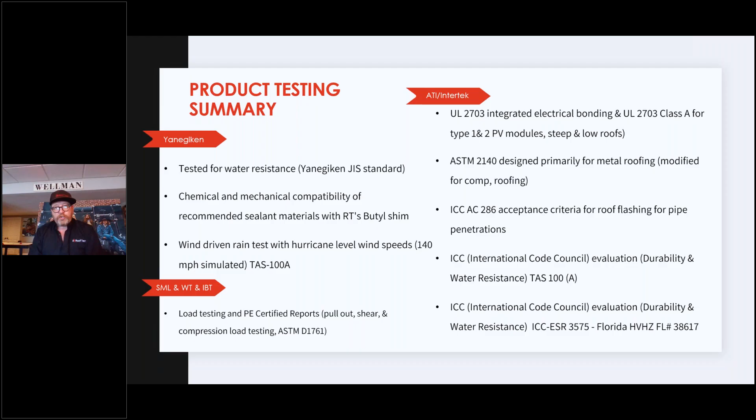I'll be hitting on a lot of this throughout this presentation with the amount of testing that we do. I think because we are a Japanese company, we like to fail on the side of precaution. Before we even send out anything to SML or UL or ICC, the International Code Council, things are done in our own facilities. We have in-house facilities in Japan, and we also have outside facilities. So before we even start having third-party testing, we already know what the outcomes are going to be.

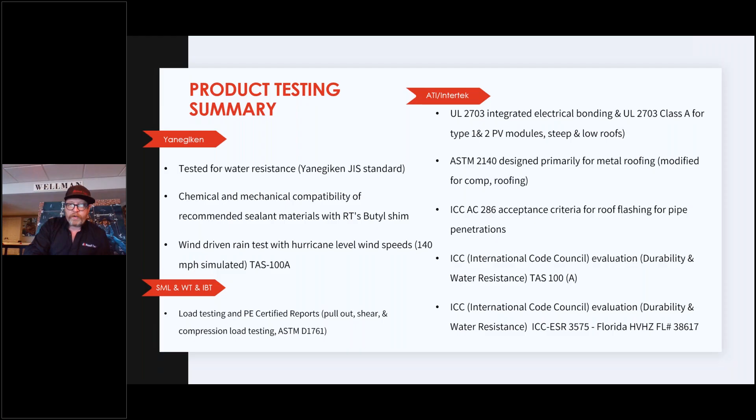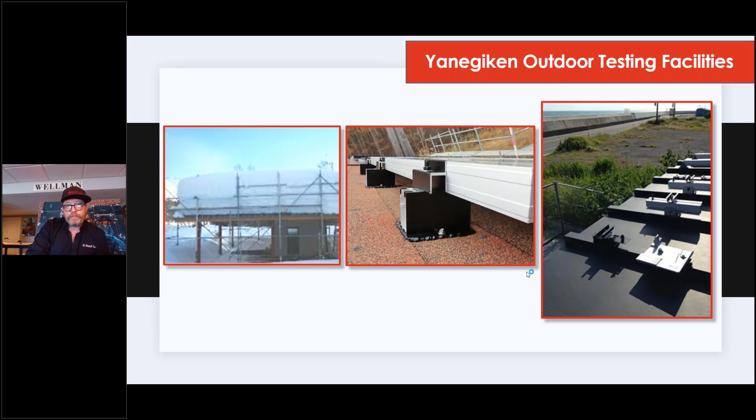I showed this test, this is some of the load testing we have done, but this is where we identified that with our Mini - I'm not sure if you guys are aware of our products or who uses our products, but basically all of our bases, from our railless to our Mini and even our new RE Plus or RT Plus, are set out basically the same. They have offset hole patterns.

The holes are not going to be directly across from each other. A lot of products out there now - we were the first to start doing this - because we were the first to identify that when you're installing this and using a top-down solution with screws and a combination of butyl, there is a possibility that you could be putting a base down right where the OSB meets, the plywood meets. This is a butt joint. So there is a possibility that one of those screws with our base could be in between those butt joints and really rendering it useless. It does not have any value.

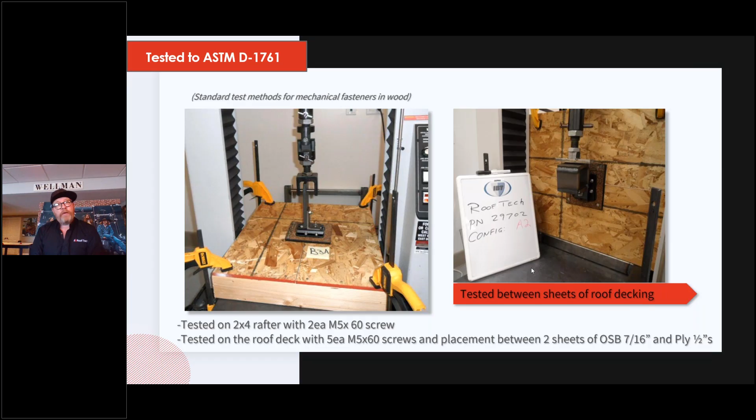So just because we say, hey, we have a 5-screw pattern - like if you're going for a decking solution, if you're going for a rafter, it doesn't really matter if you hit that butt joint because you're going to be hitting that rafter. But in any case, when you are doing a decking solution, there is a possibility of rendering that useless. So really 4 screws is what's required, but we think there is that possibility that one could be in those joints. So that's why we do have 5 screws.

More on the testing - this is a water test. Again, we're going above and beyond what these different facilities are asking for in testing. This is a fully submerged test. So when I say we're a waterproof solution, we are a watertight solution with our combination of screw. It's a double helix, designed to actually pull this butyl into the void and sealing it up at point of contact. Again, you'll hear me go back and forth between butyl or AlphaSeal technology.

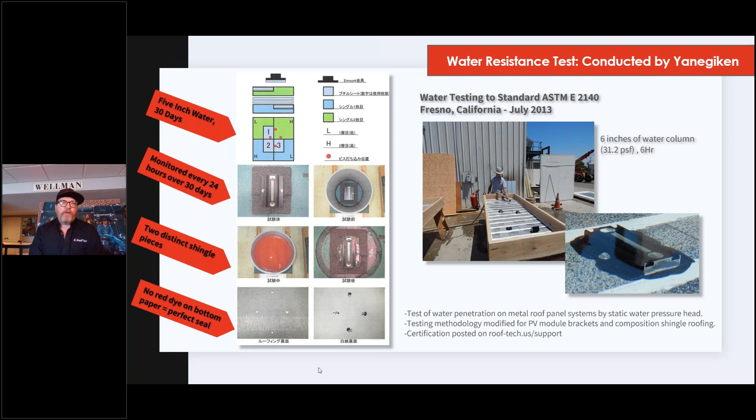The AlphaSeal technology is what we call the butyl, because not all butyl is the same. You could go to a Home Depot or a Menards or any kind of Ace Hardware and buy a roll of butyl. And I'm not saying that slapping that on the back would help, but it's definitely going to be different. This is our proprietary butyl, and that's where it's sealing up.

More on this testing - right now we are still continuing testing even our current products. Right now I am trying to work on our guys being able to install these products while it's wet or dewy outside. That trapping any kind of moisture in between the butyl and the shingle really is not going to matter. And we've kind of identified this because we've done these tests where we install it into like a bucket of water, so it's completely submerged.

When we put the screws in, we back them out - you can see the drip. You back it out halfway, it's sealed up. It's just, again, going above and beyond for this watertight seal. When most of the products out there are a water diversion, it's pushing the water away from the holes that you are creating instead of making it a watertight seal.

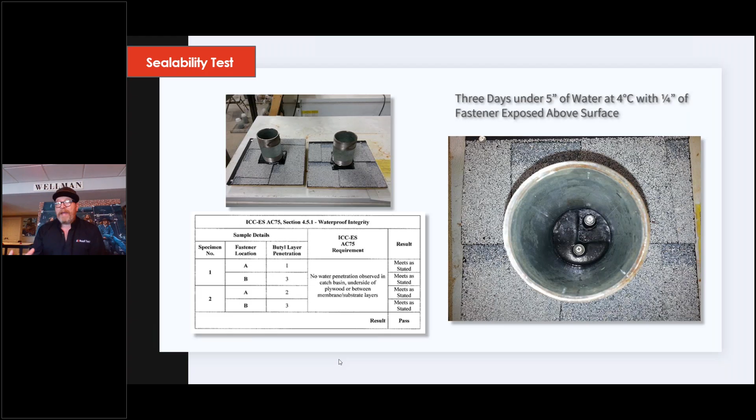They're easy to obtain, they're just expensive. Really, we're just going where the work is. If there's not going to be a lot of work there, people can do a one-off and we can point them in the right direction. But for areas that do have a lot of consistent work, that's what we're hitting up. You can get these on our webpage, or you can email me anytime and I can send them to you directly.

Having a tough time navigating this little scroll here. So again...

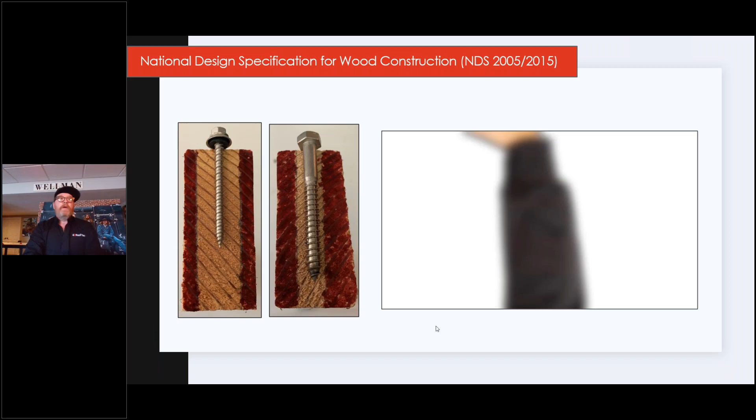Still, there we go. So these are our screws on the left. We got away from a traditional lag bolt. This is something that was done by the National Design Specification. This is basically stating that whatever you're putting into a rafter, because I still say that we need to hit quite a few rafters with our attachments.

We're not just a decking solution. So an all-decking solution is not really going to work in Canada with the snow loads and weather conditions. But down in Arizona and areas where there's obviously no snow, you can get away with more of an all-decking solution. But this company is stating that it should be 1.5 times the diameter of whatever you're putting into the rafter.

You can see the red in the areas. You put that on either side, and that screw or lag bolt cannot get into that red. If it does, you're risking blowing out a rafter, or also rendering it useless, or it's really not going to have the value that you think it does.

So it's just showing you that we're making it a lot easier for you to hit that rafter and know that the strength we're telling you you're going to obtain by hitting a rafter, you're actually going to achieve, because it's smaller. And I always say too that I like standing on 2 feet, not just one.

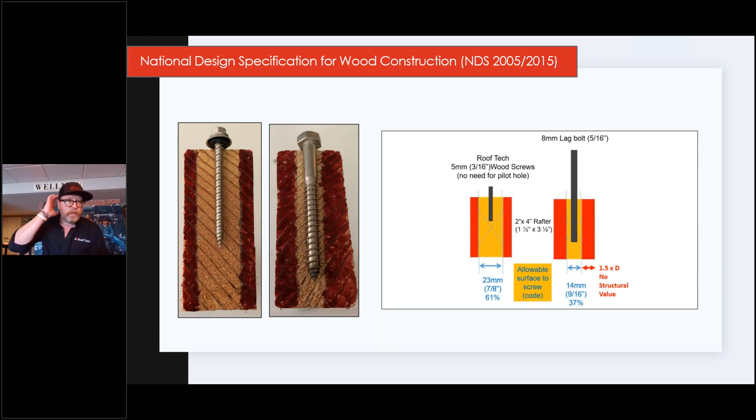Now, this is happening in the US a little bit more than in Canada right now, but you're having a lot of systems coming up on that 25 to 30 years of being installed, and either needing a new roof or selling houses. When they do inspections and they see this kind of thing, this might have passed when they installed the system, but it's not going to pass now, and there's a lot of fixes.

There's a lot of people going out there. In the US especially, there's a lot of companies that switched from doing brand new installs to doing remove and reinstall, fixing issues like this, just because of new roofs needed or selling of the house.

Again, you think that just because we're putting probably more holes on the roof than what people are typically used to with that one lag bolt solution, it's still just less damaging to the rafters altogether. It's less damaging to the roof as well.

Thanks, Guy. Just a quick question too - we should only be using Roof Tech screws with Roof Tech minis, right? I'm assuming a warranty might be void if we're using a different screw for extras.

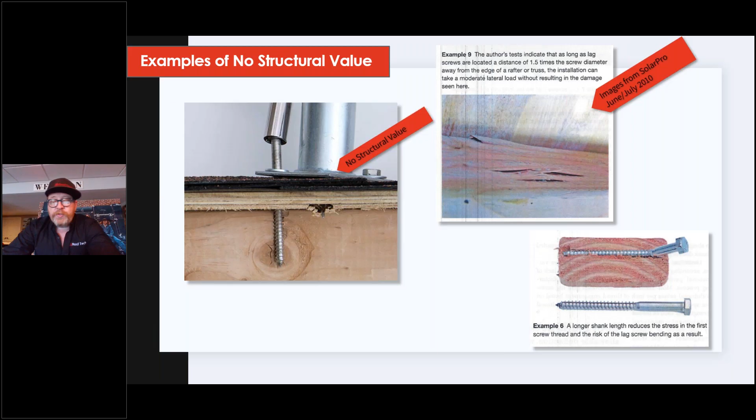And yes, using outside screws definitely voids the warranty. Thanks. Yeah.

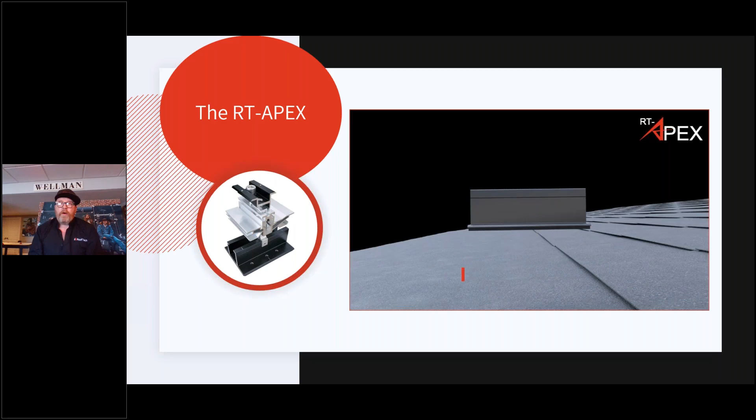So this is our RT Apex. This is our railless system. I don't know if you guys have come across railless before or used railless before, but that's how we started off. Our solar installs all were railless. Our products were railless at the very beginning.

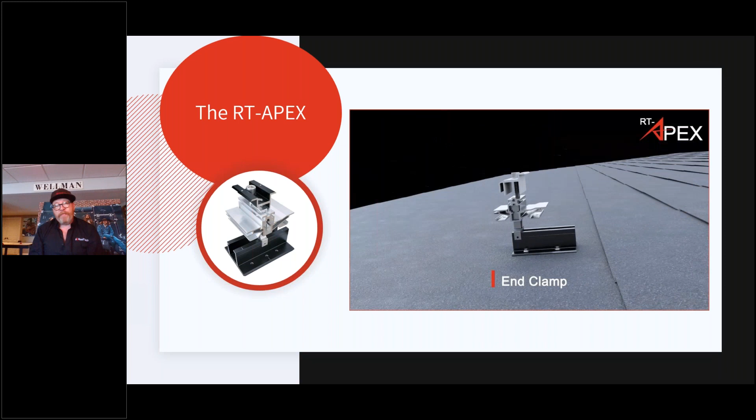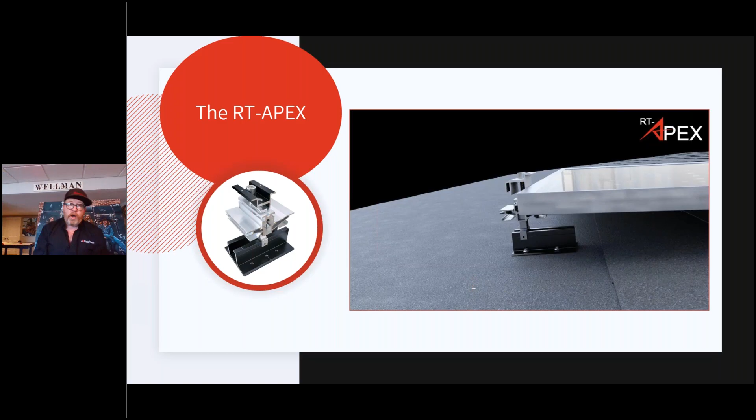And then we saw people grabbing our bases and attaching L feet to it and making the rail. So that's how we ended up developing the Mini. But we started off as a railless company, and this is our third generation railless.

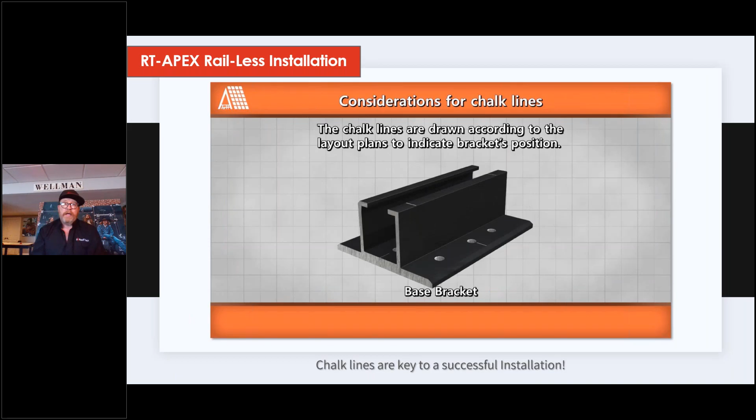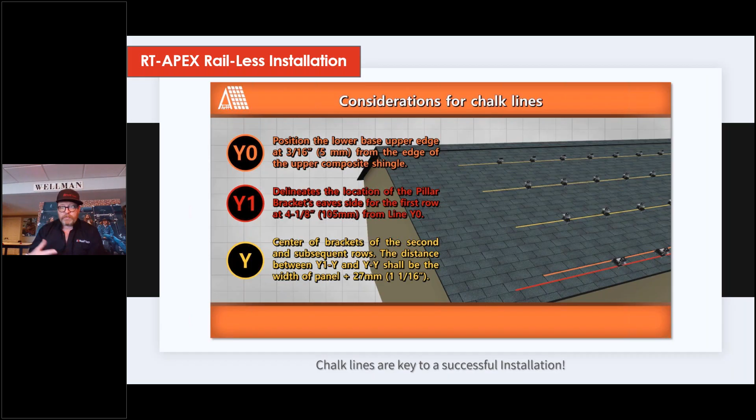So this video is showing you the layout guide and how to snap lines and take measurements for our railless system. We're not going to watch the whole thing, I just want to show you that we have a lot of continuing education on our webpage. Whether it's our railless, our Mini, new products, or conduit mounts, whatever it is, we make it a lot easier than just grabbing an installation guide, because as many of you know, most installation guides for any racking out there somewhat resemble stereo equipment instructions. They're very hard to understand or figure out how to measure certain lines. But we do it visually just so you have it there. You can also call me at any time.

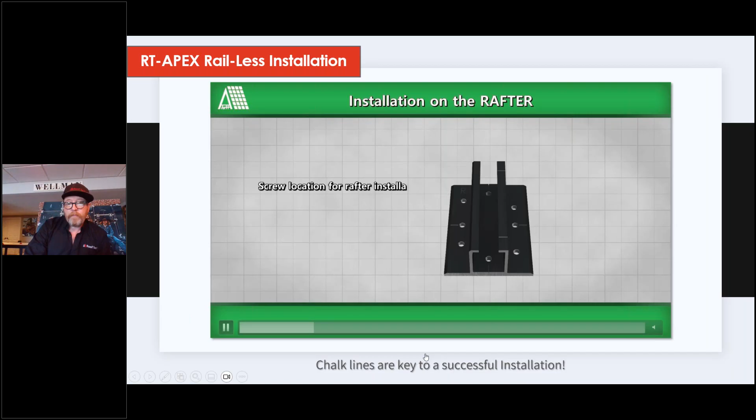There we go, it's like a lag on changing videos.

With our system, the railless system is one of the things we offer through BayWa as a buy-one-get-one-free program. So you buy a system and get a system, and if you do this back to back, we can typically be there for training on both occasions. So we do training for free as well on this. The reason we do this is because it's a lot different than what people are used to with a railed system. I'm not saying a railed system isn't going to fit for everybody, or that everybody's going to switch over - there are a lot of reasons to switch. But to know the system, it's a lot easier to have us come out and teach you how to use it than to try to figure it out on your own.

So this is the wire management side of the process. It's different - everybody else is used to throwing up their bases, throwing up their rail, and then doing all the wiring and wire management to those rails before even putting down glass. With this system, there is no rail, so everything essentially goes on the back of the module, which is a lot different than what people are used to, and a lot safer too, because you're doing more of this work on the ground than before. Your inverters go on the back of the panels, and all the wiring is done through the edge of the panels. S5 has a good MLPE bracket to attach the inverters, and EZ Solar is coming out with more products, it seems like every day, for wire management on both the rail and railless side.

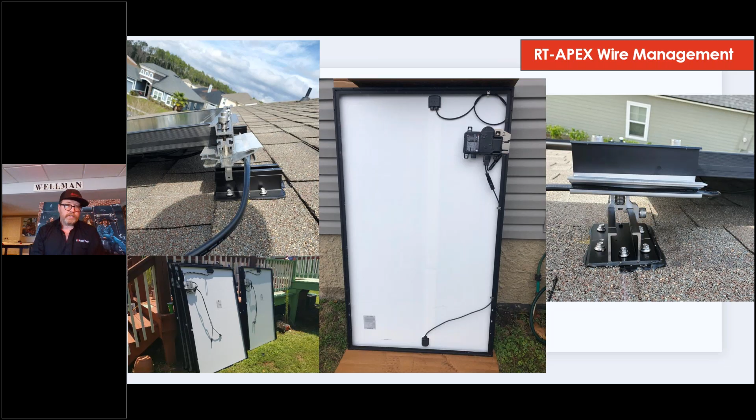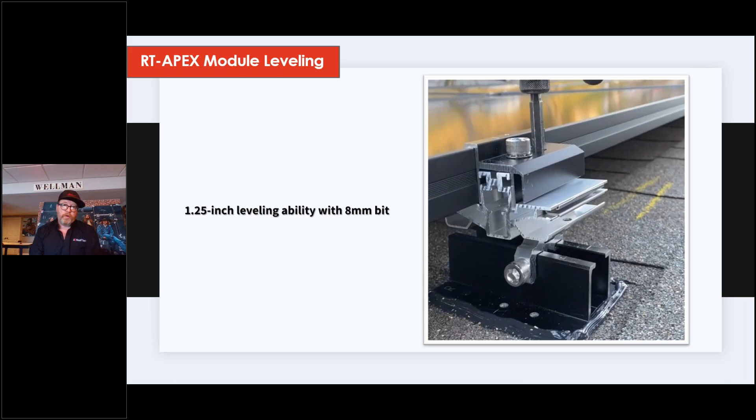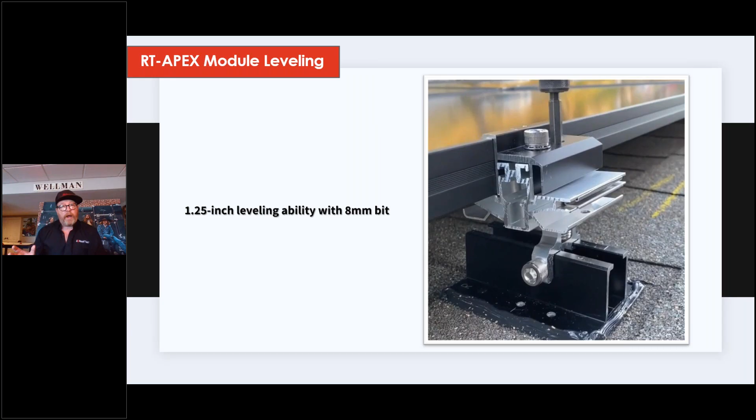The leveling here is right on top. We make it a lot easier than any other railless system on the market. Most railless systems require you to take apart the clamp almost altogether to get the leveling down - you're loosening the attachment to the panel, putting it back down, and hoping you got it right. Even some of our first generation railless was working with shims to do the leveling. But what I tell people, even if they're just going to use this as a one-off - maybe they get to a site, didn't see a stink pipe or something in their way, and the array doesn't quite fit the way they thought, so now they have to stick one or two panels outside the array in some area - throwing up a couple of clamps is going to be a lot easier than cutting little pieces of rail and having wasted rail just for those cuts. Then you can do the leveling here to match up perfectly with your existing array, so it looks just like it's all one array.

In this slide, where you can see the modules outlined in blue, the reason I'm showing you this is because the lower side of the roof is flat rolled asphalt, the one above it is a pitched shingled roof, and you have an offset array. The railless system altogether is a much more versatile product - it can do a lot. If you want to write your name on a roof, you're going to have an easier time with a railless system than a railed system, obviously. Sometimes these roofs will have one big array on the biggest part of the roof, and then they fill up a lot of the blank area with creative designs, whether it looks like a lightning bolt coming down or an upside-down triangle. It's just a lot easier with the railless system.

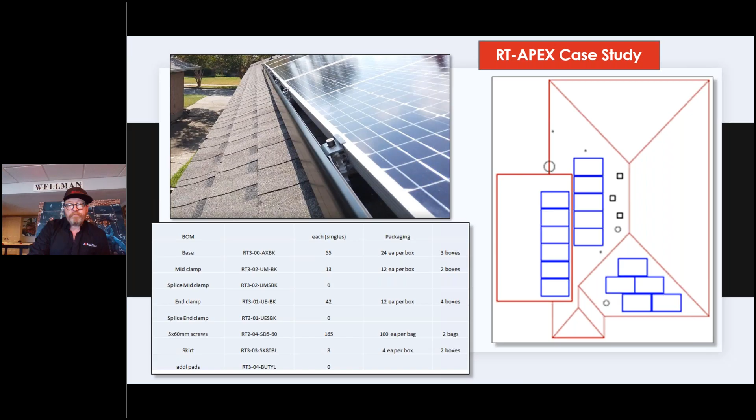Our Apex estimator, which is online, is something we try to do to make it a lot easier for you guys to come to BayWa and say, hey, this is what we need. It's very easy, a lot of drop downs, a lot of drag and drop. This is stuff that we can do with you guys.

We can train you on this. You guys could give us your specs, or we can do it for you, leading into you learning how to do it. But it's basically going to give you your BOM, your bill of material, and engineering docs.

It's very easy to come out with your layouts. Blue lines are your rafters. It's something I've seen a lot, and when we do our trainings, I bring a laminated copy of this array to show the installers, since sometimes the installers themselves, some of the lower guys on the totem pole, don't really understand what they're building.

What's the design look like? There's one head guy who's chalking out lines and just telling people, hey, where the X meets, that's where you're putting bases. And when they get to the end, then they see the layout. It just makes it look a lot easier.

It helps these guys, but ultimately this is something you guys would be providing BayWa saying, hey, these are the parts and pieces I need. It also states your criteria for that individual install - your pitch, your roof, your building material, and where it's located.

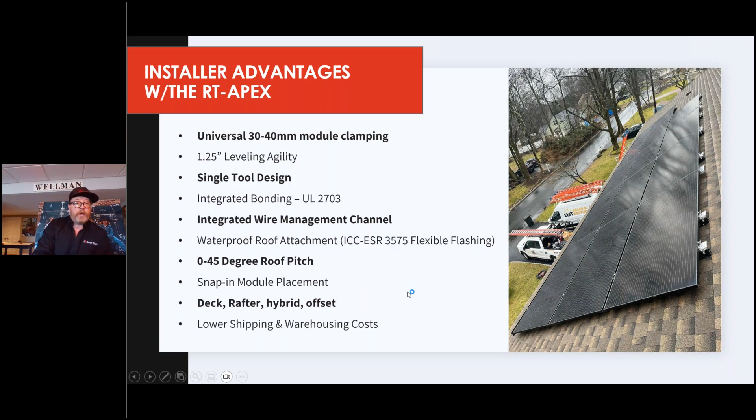Some of the things with the railless that we're offering you is BOM training, showing you what you're going to need, all the parts and pieces. Again, this is something we can handle for you going into it. But number one is the buy one, get one. Buy a system, get a system.

I always try to tell people, especially when they want to take advantage of it, saying oh I've got this crazy amount of modules we're putting down, I'll take that one for free. Obviously the less expensive one's going to be the free one. I always say too, try to make it simple. I'm just coming out there to teach you how to use this system.

Sometimes people want to get creative, and really the most difficult install is the one where they want to try a new system. Your installers are not going to thank you for it. But it's something we provide that nobody else does. So if you guys ever want to try something like this, let BayWa know, let me know, we'd be happy to come up and do the trainings with you. It's not that it's not a cold weather install, because it is, it's just nobody wants to learn a new system when it's freezing outside. They want to get in and off the roof as fast as possible.

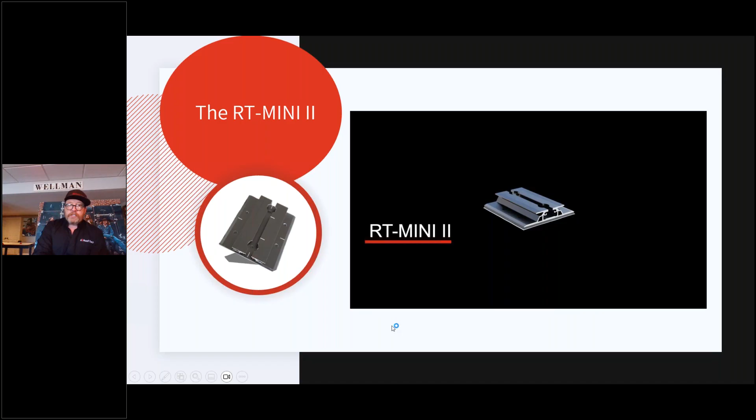The Mini really came from us starting off as a railless company, and then hearing that people are putting L-feet onto those bases just so they can install a railed system. So we developed the Mini. I don't know if everybody here is using the Mini or has never heard of it, but this has been the most popular product. It's designed so that we're just the base, and it's going to be anybody's L-foot, anybody's rail. So it just makes it a lot easier.

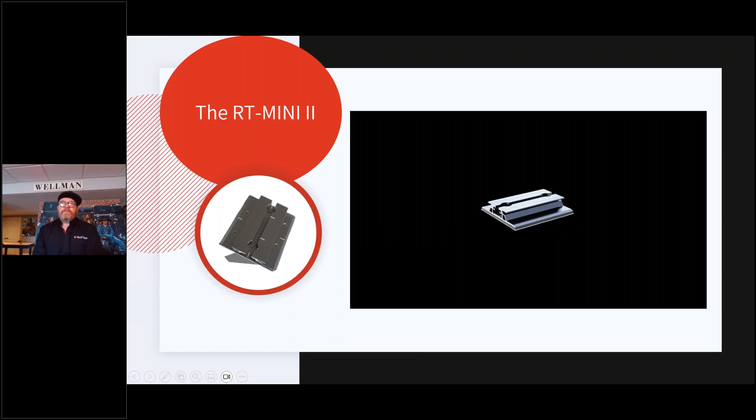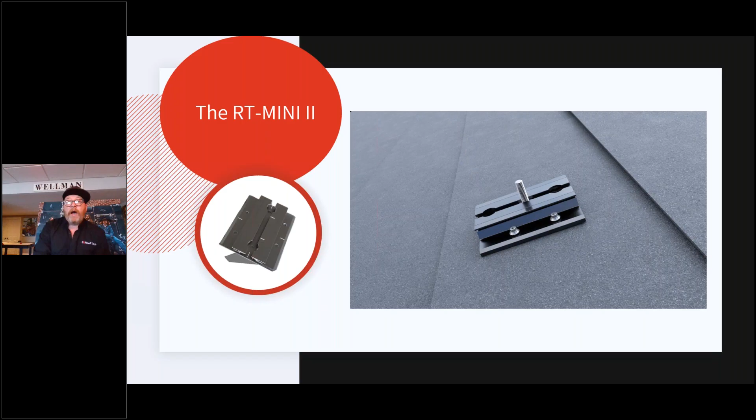Everything you guys are currently using with your railed system is going to stay the same. All the clamps, all the clips, all the parts and pieces, it's just going to be our bases, our screws, and then our nut and bolt to attach the L-foot. But outside of that, it's going to be somebody else's product.

Guy, just a really quick question for you. Somebody was asking about the railless system, and have you ever had any applications where they've done railless on a vertical wall? The person's just curious, or with the Roof Tech Mini. I'm assuming it would be site-specific engineering required for it, but could it be installed on the wall, the railless or the Roof Tech Mini?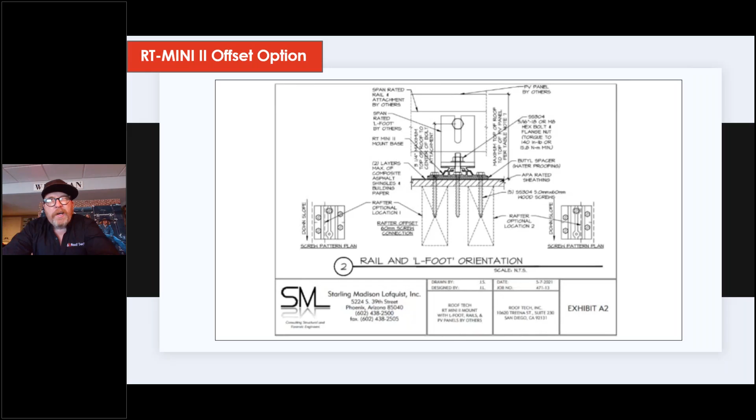Yeah, again, it's just going to take that site-specific engineering. I actually had a call about this a few weeks back, somebody asked that, and yes, you just need to have that engineer come out. They basically look at our engineering, and then it usually takes a couple conversations, or at least one conversation, with the engineering company and my engineer, Milton, to get somebody to sign off on this. Because then it's going to be site-specific spacing. So I would say it would be easier with a railed system than a railless system, the more vertical you get. Perfect, thank you, yeah.

So this is basically showing, there's not two rafters here. This is showing that all of our products were a rafter attachment. We're also a decking attachment. We're also a hybrid where you can go deck rafter.

With the Mini itself, you have about 3 inches to hit this rafter. So you put in this top screw, the first screw here, and if it does not bite and you have missed the rafter, whether it's from mismeasuring, maybe the rafter's off. I've been on sites in Canada where it's gone 16, 22, it's all over the place, or the rafter seems like it's about 8 inches wide and it ends up being an attached addition that was an exterior wall, and it just confuses people. But we're making it very easy for you to hit this rafter.

So if you're out there, you hammer out your rafters, you chalk them out, and then you're pretty close, you hit that first screw and it misses. What I tell people is you don't move it. You just put the other screws in to make it a decking attachment. And what you're going to do is probably hit those rafters on one of the sides, which is our offset rafter attachment.

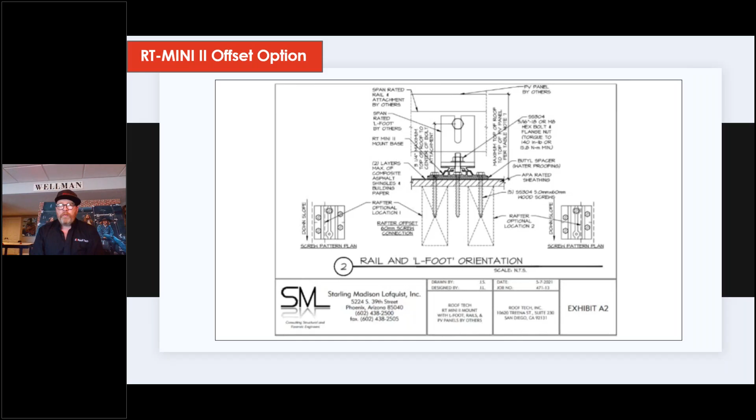So we do tell you, it's about 3 inches to hit a rafter, and with a hammer you should not have a problem hitting these rafters. Now if there's some sort of building mishap where it's almost like they missed a rafter altogether installing it, you don't have to move it. You can check your spans again, but just make sure you hit your next rafter. So it's not the end of the world if you miss a rafter, but more times than not, if you miss it with that first screw, you're going to hit it with the additional screws, so it will be an offset rafter attachment.

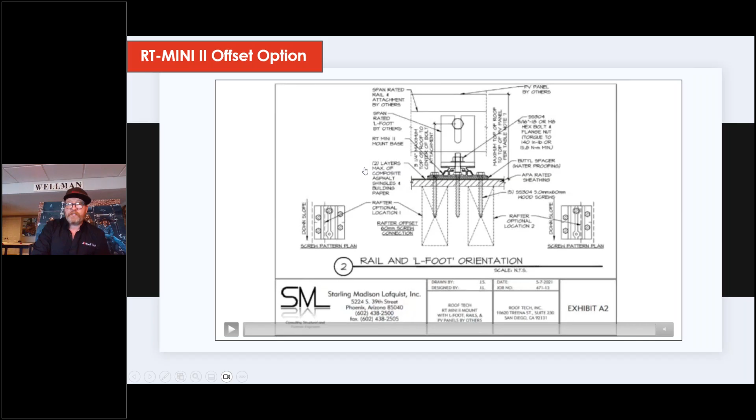One of the biggest features with our Mini is the adjustability of the L-foot itself. This is something I've been preaching since the beginning. Now I tell this to some guys and they say, hey, I'm perfect, I don't need this adjustment, I never have a problem.

Well, this is for the guys that sometimes either have damaged rail or the bases are just slightly put down in the wrong area. Sometimes they'll have a bunch of guys installing bases. I tell them, why don't you have each guy do a different row? That way, at least they know where they're offsetting it, where they're putting it, how far away were they from that other shingle course, just so they can all do it at the same area.

That way, if you had a fixed L-foot, sometimes you come to the job, you have a bent rail, or they mismeasured the feet, and you are squeezing or bending that rail to try to meet that L-foot, which puts undue stress on the roof itself. It binds the roof up. And I tell people, if it's too bad, in the course of just one year of going through weather—hot, cold, wind, rain, snow—you're definitely more likely to have a lot of loose nuts and bolts just because it'll shake it loose. But with this product, being able to slide that L-foot to meet that rail, it's less damaging to the roof, and you eliminate any kind of binding issue.

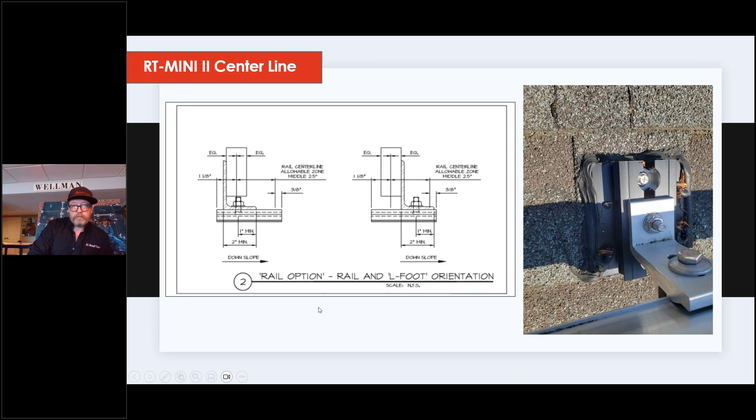So again, some of the things with the Mini that I haven't said—it got rid of all the pre-drilling. There's no pre-drilling, there's no pre-caulking, and there's no post-caulking.

Now back to the testing that we're continuing doing. For the longest time, 5 or 6 years ago, we required on our Mini 3 sides of sealant, on top and both sides. About 5 years ago, we got rid of that—we didn't need it anymore. Again, that's the Japanese erring on cautiousness, they just want to make sure. We do have it in our install guide now, but it's there for added UV protectant.

But you'll see in slides coming up here that even systems I'm pulling off that are 20, 25 years old, the caulk that was there is cracked up and broken, but the butyl or our AlphaSeal is still gummy, still malleable, still doing what it's supposed to do. So that's what we're doing.

We're trying to get rid of that, and we're trying to make this job as fast as possible. I like to say I'm taking the guy that's pushing a broom or carrying boxes, and now you can have him install bases with little thought to thinking he's going to mess this roof up.

So it's going to have a 25-year warranty like all of our products do. It's one of those products that's versatile, that can go down to that almost zero pitch, positive drainage, to a 45. So it's that low slope roof all the way up to the pitched roof.

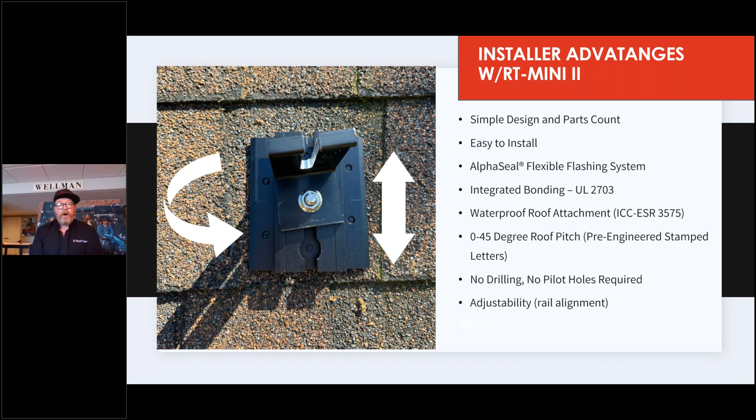So this conduit mount is something that just came out, and I believe BayWa has it—Jeremy can answer to that. But it's just been a great product for us. I know that up in Canada, a lot of guys, or in different provinces, can get away with installing old hockey pucks.

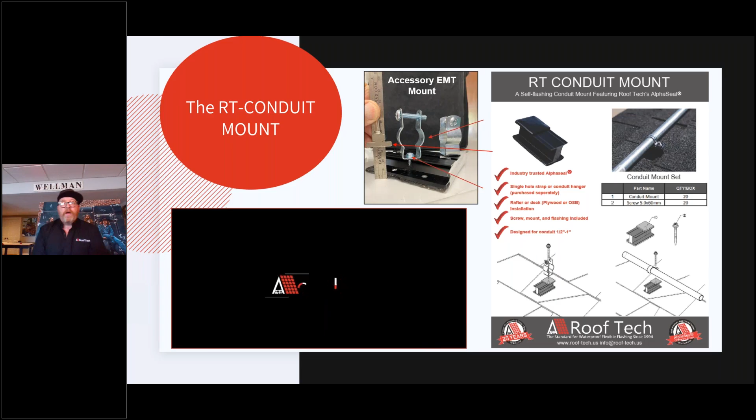But again, you're relying solely on sealant, where you just can't with this product. It's sealing up at point of contact like the rest of our products. It has that 25-year warranty. It's just an easier product to use, and again, not relying on any kind of sealant.

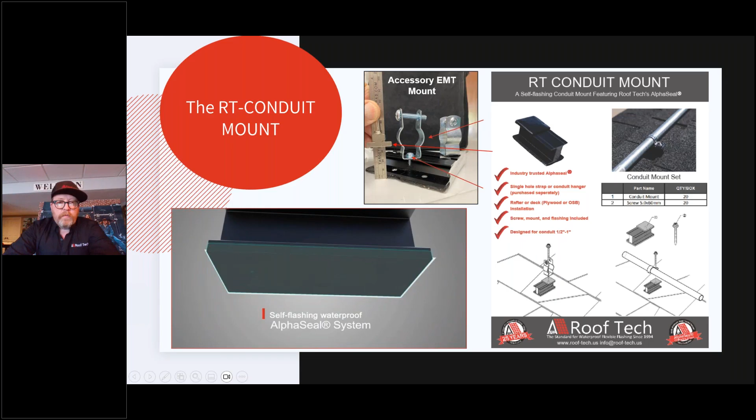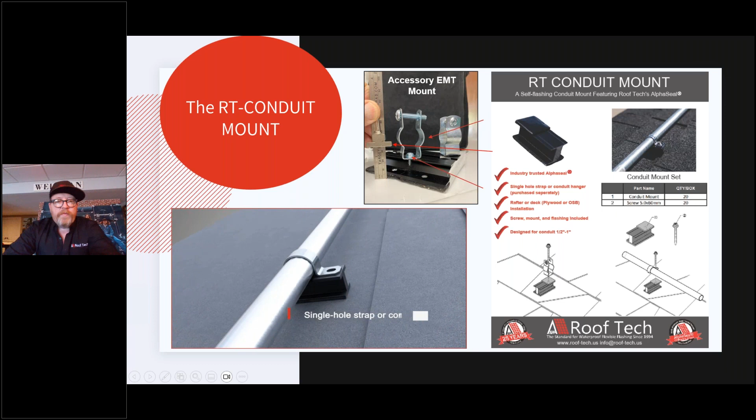And yeah, we do carry the conduit mount too. If anybody's looking for some samples, just hit up your outside rep and we can show it to you. But the people who've been using it have been loving it. It's just an easy product to use. Comes in boxes of 20. It does come with the screw already, so you're not buying that additionally. It only takes the one screw, so it definitely has been something that a lot of people have been liking.

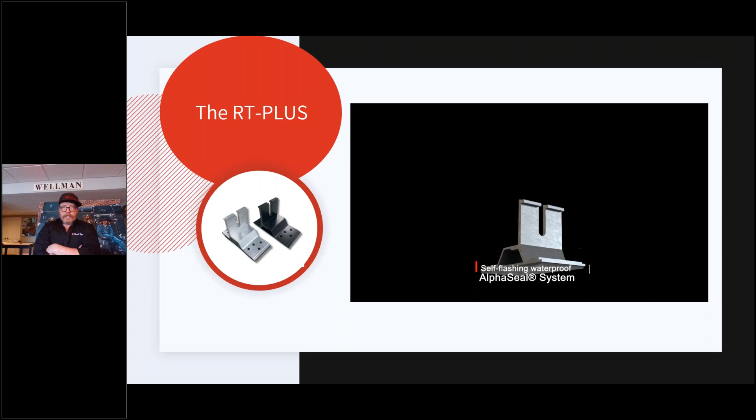So this is a newer product. It's not up in Canada right now. This is our RT Plus. This is something that we brought to market here in the last year, basically in the United States. A lot of people have been slapping butyl on the back of their products, saying, hey, this is just like the Mini. It's still not. They're still having issues, but a lot of fixed L feet, a lot of fixed attachments, where this is getting away from what I have been preaching for years of needing that adjustability.

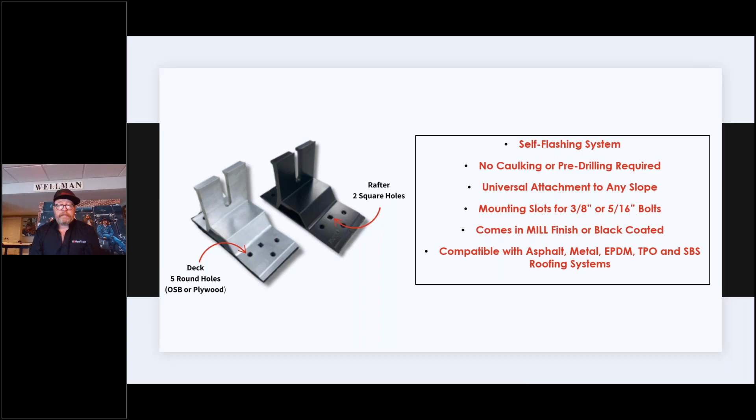But it's just like the rest of the products, where it's 2 screws for a rafter install, 5 screws for a decking. But what this has done is it's actually engineered to attach to the rail first. So it's eliminating the need to have that adjustability. So no, it doesn't have the adjustability that I always talk about, but by attaching it to the rail first and taking it up to the roof that way, you still can slide it east and west, but there is no need to be bending rail, or even on a completely bent rail. Wherever these bases lie, that's where you're going to install them.

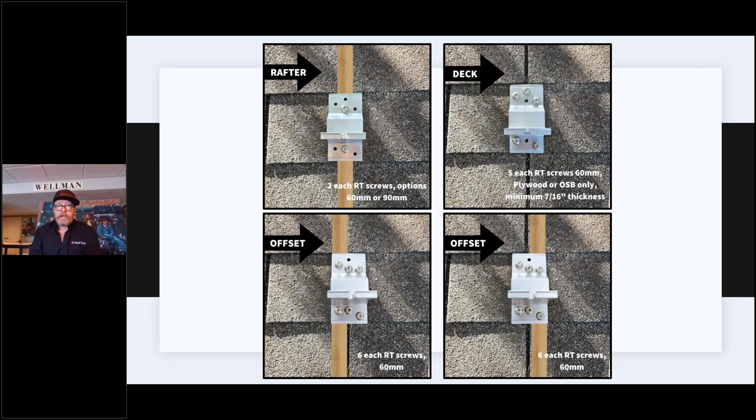So you can see we've still got an offset rafter attachment. We have a rafter and a decking, so just like all of our products. Think of it, every one of our bases had the similar design. They have an offset pattern. It's 2 down the middle for a rafter. That's it. So if you're hitting a rafter, you only need 2. That's with the Mini, that's with our Apex base, and that's with the RT Plus. And then 5 screws for a decking. Now on this one, because it is a little smaller, the offset rafter attachment, we do ask for 6 screws. You're going to fill all of it. It's just going to give it more strength when it's going to lean side to side.

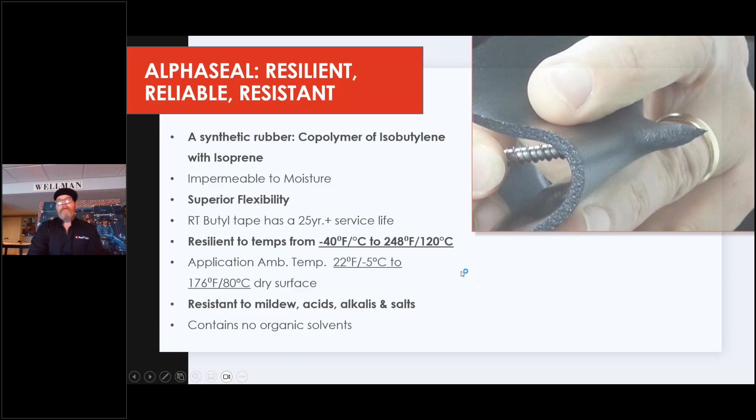So our AlphaSeal, this is the butyl. I mean, it's nearly impossible for me to call it AlphaSeal all the time. I start saying AlphaSeal, people are saying what? This is the butyl. Now, this has been the same for the 30 plus years that we have been creating products for solar. It's been the same screw configuration. It's been the same butyl or AlphaSeal backing. And this is the black magic. This is what makes us so much different than anybody else. This is what has kept us at 0 leaks in 30 plus years and 40 plus million penetrations worldwide, is the butyl. This is something that is ours. This is our proprietary butyl, and that's going to make us different.

People can slap on butyl. People have horror stories back in the day of people putting butyl on the back of L feet, pre-drilling, and putting that right to the roof, and then just caulking it up. It's just once that caulk falls apart, the butyl ends up getting hit, and then it falls apart completely. This is just going to be different, and this is, again, what makes us a watertight seal, not a water diversion. So you can see here the temperatures.

A lot of people ask about this, so think of it as like your caulk or your sealant, what you guys used back in the day. You didn't keep it in the snow. You kept it warm when it was cold outside. You need to treat the bases the same way. Now, they don't have to be hot, just need to be warm. And what I tell people is that a lot of installs you get to that are cold weather, the heat from the house is going to keep the roof relatively warm. It's not going to get too cold on the roof at all. But the product itself, if you take a heat gun up there, I said one of the best tests to do.

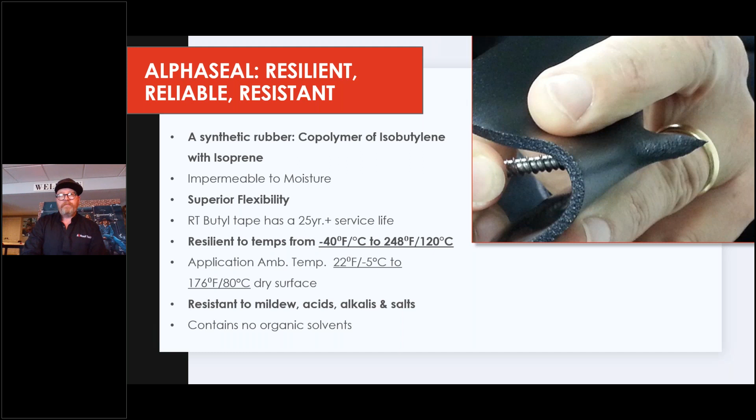Hey Guy, just another question here for you, pertinent to the foot you were just talking about. Does the rail interfere with the screw for attaching there, or is there clearance, like a deep socket or something like that? There is clearance - it was designed that way to not be in the way. That is one of the biggest things we get back on. That was one of the tests, to make sure it's wide enough to get past that rail, or that the screw patterns are past the rail. So you are good. Perfect. Thank you.

I've got guys that say, what do I do with this leftover butyl? Really, I would always leave it behind for the homeowner. Explain that this is what's actually on the back of your product, and put it in their garage. They can seal window sills up with it, or there's a lot of things the homeowner can use it for, that way the installer doesn't get boxes and boxes of butyl.

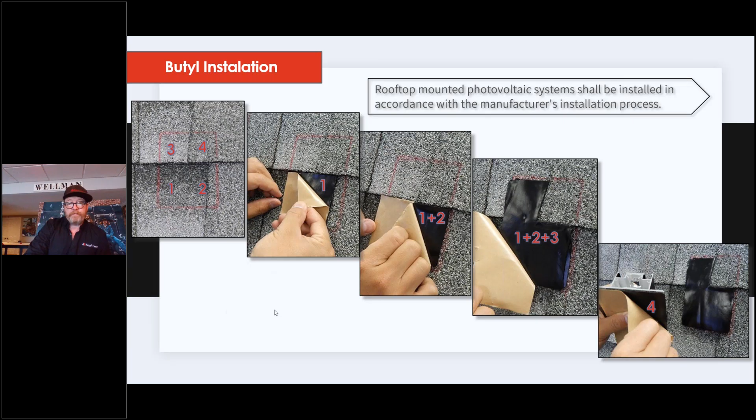Now, when I was in college in the summers, I would paint houses. There was a company around here doing that, and it really didn't matter - you could buy the most expensive caulk, and in a couple of years, you start seeing damage to that caulk, even though you're painting it and coating it. So it's just to show you that it doesn't really matter.

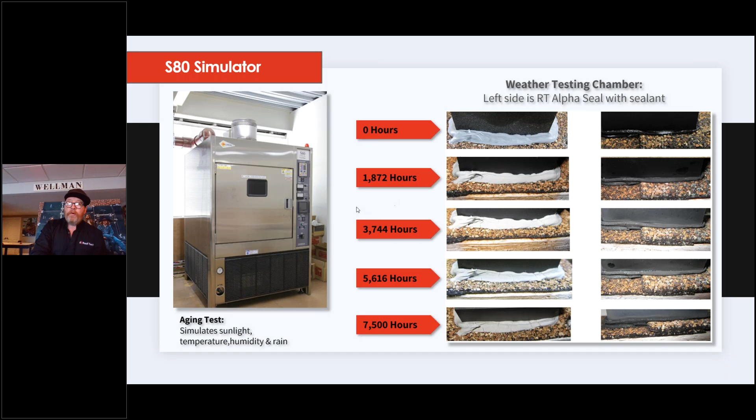I mean, ChemLink has got a great sealant out there if you need to use it for any reason - that's a product we have always stood behind. You could get probably close to 5 years on it without much cracking. But at the same time, you can see the butyl - it just still stays gummy, it still stays malleable, pliable. Now, this is something that I'm seeing a lot of.

People doing re-roofs ask, how many times can you use a base? All of our bases can be used up to twice. So you can use it that first time, and let's say 10 or 15 years from now, they need a new roof.

You can use the same bases, obviously not the screws, but the bases need to be completely cleaned of any excess AlphaSeal or butyl from the back. I tell people this, and they get through about 4 or 5 before they get frustrated and just say, I'm going to buy new bases.

It is a difficult process, but to know this and to be able to tell the homeowner that yes, if in 5, 8, 10 years you need a new roof, you can use basically all the same equipment that you have on that roof.

On that far right, you can kind of see it there. You can see that the butyl underneath or behind the cracked up sealant is still tarry. And that's why this is sealing up at point of contact and making it a waterproof, watertight seal.

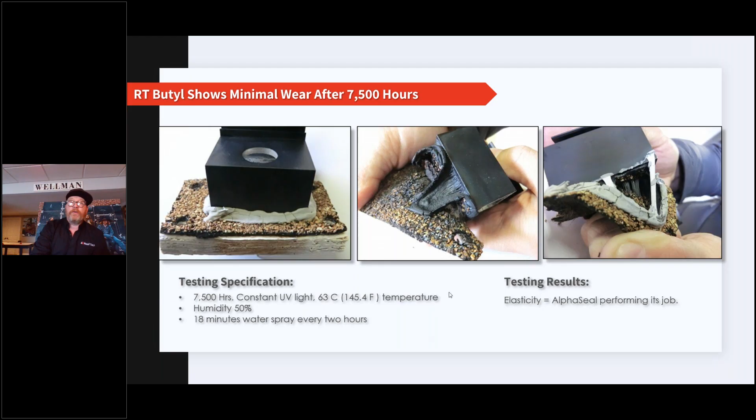This is something that we used to do at a lot of shows. I know we did it with BayWa maybe 2 years ago at ETC. We did not have the fish involved that time. We did get in a little bit of trouble with PETA before. I don't know how they find this kind of stuff out, but we were no longer allowed to use the fish. It just made it a prettier, more funny thing at your booth - basically a fish tank for the couple days we were doing a show.

We would install our product in water. It's not that we already put the product down and hid some sort of sealant. We went right into the water and installed the product, backed the screws completely out like I said earlier, and you would see it drip. Then just use normal OSB or plywood, and shingle it. We wouldn't even really do the underlayment paper, because we were kind of rushed for time.

But we would do shingles, just what you would normally run across in the field. Then we'd install it and set this up at a booth, and it would be there for the 2 days so people could see that it did not leak. This was putting it into water to install.

Over time, this is again something I've gone back to my guys about, to say, why can't we start testing again to see if we can install these while it's dewy out? I know that's a problem in a lot of areas, especially in the north - I'm in the Midwest in the States - it happens a lot in the summertime where you get to a job and now it's like, we've got to get the sun on this area as quickly as possible. It's going to be another hour before we could dry the roof off.

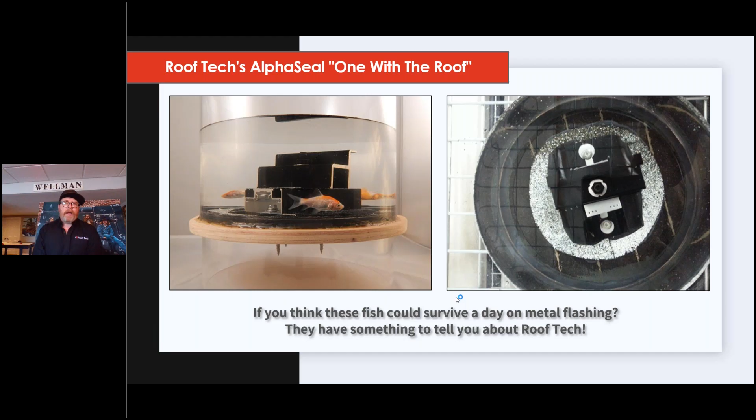But if you were able to tell installers, hey, it does not matter, even on a dewy or slightly wet roof, that you're going to be okay - that would be a game changer. Not that anybody wants to be on a roof when it's wet, but it's just to know that the moisture doesn't really have any area to go. It's going to be pushed out by that butyl, and the shingles are designed for that. So we'll see, I'll keep you guys in the loop.

I'm going to go through a couple of the products we can install on. I don't know if you're aware, but it's not just for shingled roofs, not just for flat rolled asphalt, but we're good for a lot of bitumen, a lot of TPO, and we're also good for metal roofs. Now, this is the only time the install requires a little something extra.

What we do here is, it says pre-drilling, but I use, when I get onto a metal roof, pre-tapping the holes. You can pre-tap these holes right through the base themselves, so it doesn't matter that it's poking right through the butyl. We just need a little hole in that metal, because what we're using is essentially a wood screw, and there's a possibility it could spin that butyl out before it gets pulled into the void. So I just take one of the smallest nail sets I can find and pop holes in the metal before installing the screws.

Over to the right there, you can see I'm asking for a little bit of sealant in the shape of a triangle. You can use the extra butyl, or just use any kind of sealant of choice - again, we are a watertight seal. So when you're in this little void of a metal roof, the water has no place to go.

So it's just going to pool up behind our bases, and it's not going to create any kind of leaks through our product, but it could start rotting away the metal. Standing water on anything is not good, sitting water for any amount of time. So we're asking for a little triangle of sealant there.

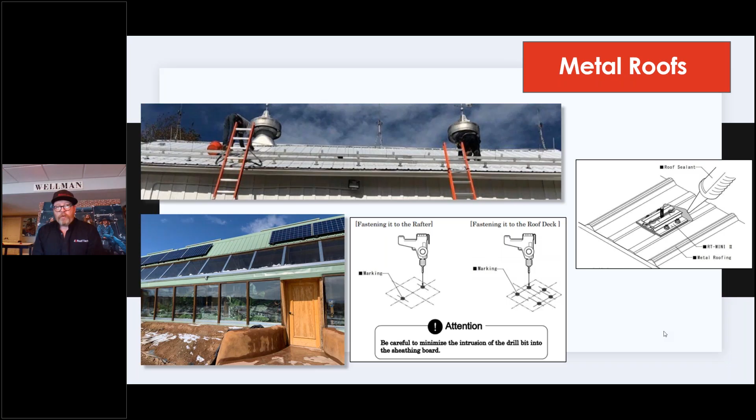Now, just because I say we're compatible with metal roofs, obviously it's not all metal roofs. Standing seam should not be penetrated - again, I push people to S5. Corrugated, there's no flat area - again, I push people to S5.

On the metal roof aspect, I tell people it's got to be like the Goldilocks effect - it's got to be just right for us to install. So it's more of a ribbed roof that we're good for. But if you're doing a railless system, you need to hit more rafters, and sometimes it's difficult to hit all rafters, or sometimes those rafters happen underneath an area where we cannot install on top of. So sometimes it works, sometimes it doesn't, and that's going to be the same for all the products I'm going to be reviewing right now.

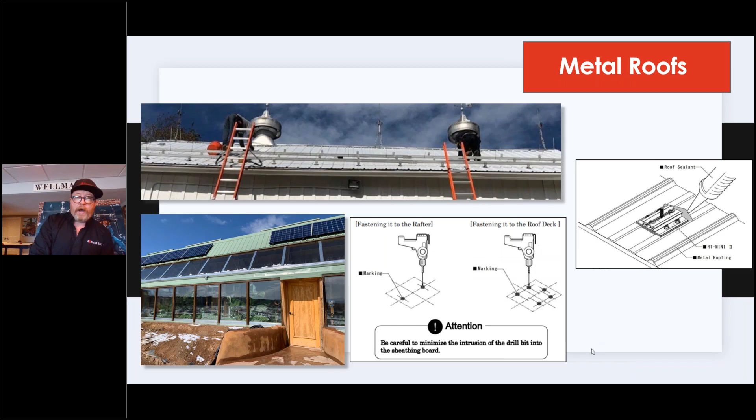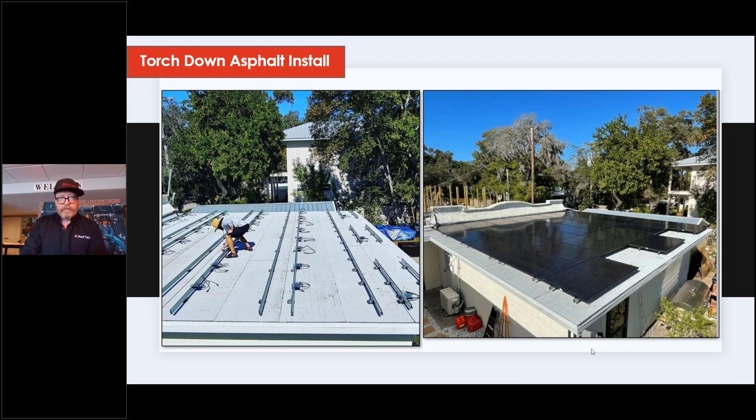Torch down and asphalt, obviously we're going to be good - there's no problem there. And I guess if you run into insulation, that's more with the TPO. Typically it's going to be TPO, then insulation, then decking, and you should not be compressing anything. Basically what happens when you install our product is it's going to start pinching that insulation and create a divot. It's going to be a little water collector, and you're just going to have little puddles all over your roof.

So I tell people when they ask, hey, can we install on TPO? Yes, you can, but have you walked on the roof? Does it feel spongy? If it feels too spongy, I always tell people there's other products out there designed for that. So just because you get comfortable using the Roof Tech product and have confidence that it's not going to leak and it's very easy to use, it's not going to be a fit for everything.

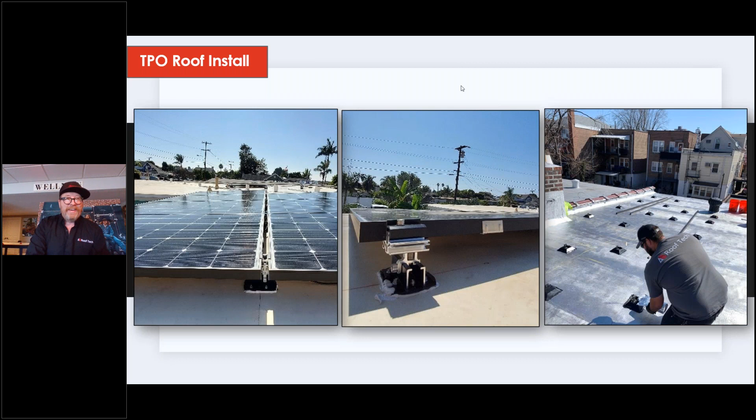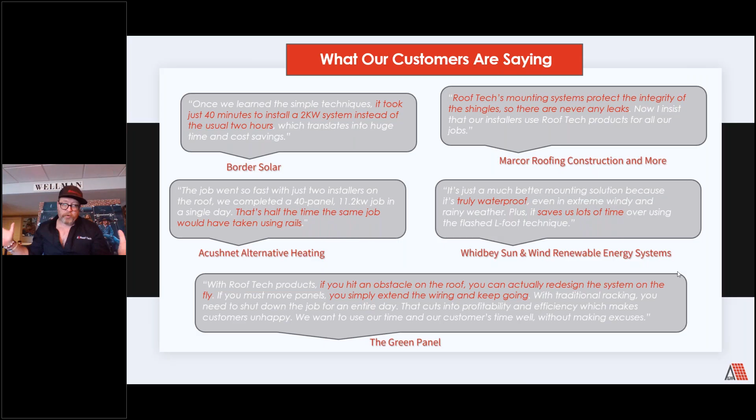But now on some of those ones where it's like a metal panel, I've seen they're kind of hollowed. I have not come across any good solution yet. I've talked to the manufacturers. They don't really have a good solution. A couple of them offer up what looks like traditional flashing. It's like a metal disc, but it compresses these metal shingles and dents them. So again, they don't have a good answer either.

If you guys run across any products that I don't already talk about or that are in our installation guide, let me know and I'll do the legwork for you. All you need to do is get me a name of the manufacturer. I'll find a contact and reach out to their salespeople and figure out if we can install. I'd like you to send me an email, that way we're not voiding anybody's warranty, but I'll usually get you that answer. And to be honest, I've scared a lot of installers away after talking to manufacturers of certain products, because even the manufacturers don't have a good way to attach anything to the roofs.

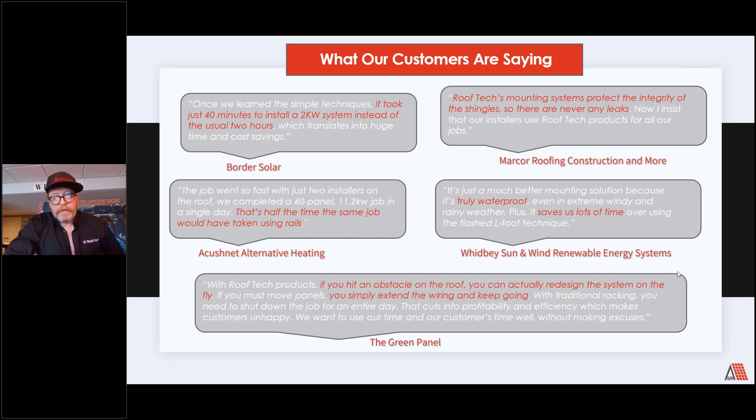Awesome, Guy. Well, thank you. And yeah, I can say from experience, Guy's super quick to get back to people about questions. If you know the manufacturer of the panel or the roof product, he's probably already dealt with it. So he's such a great wealth of knowledge. We're so lucky that we had you here with us today, Guy.